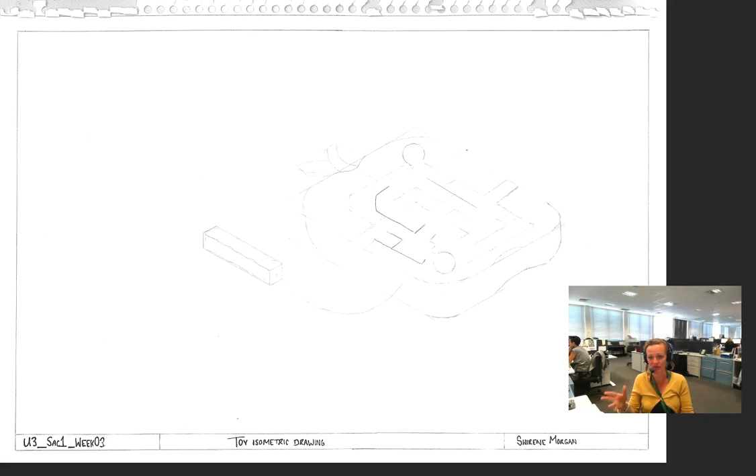So what I'm going to do with this video is just go through some of the things that might be missing. They're tiny things that might be worth 1 or 2 marks. So I'll just mention them so that you can have a chance to correct them and get it ready for inking, which you can do before week 8.

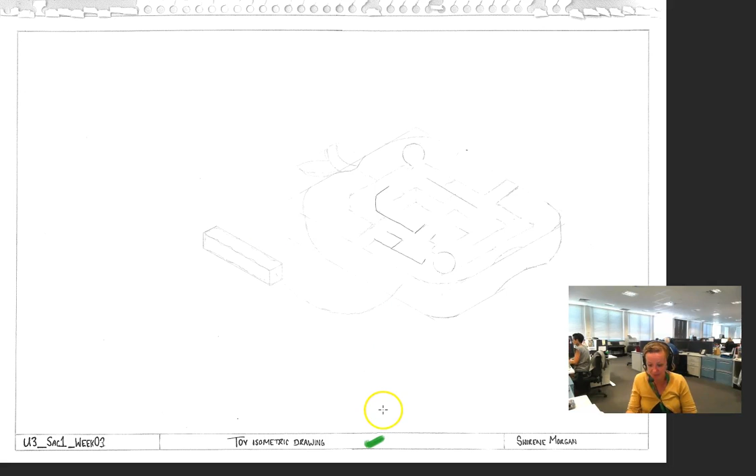So the first thing with the toy isometric drawing, I just wanted to check whether you needed to have the scale. Got the wrong brush set up, sorry about that. So is the scale the same as your orthogonal, which I think is 1 to 2? So just be mindful of that.

The other thing was, I'm not sure if these circles here, they look like they're sticking up, they look a bit funny, so I just wanted to make sure that you have actually drawn them correctly in the isometric view. So I'm actually going to draw a square. Imagine that square is 3D. That's now an isometric cube. So I'll do it see-through.

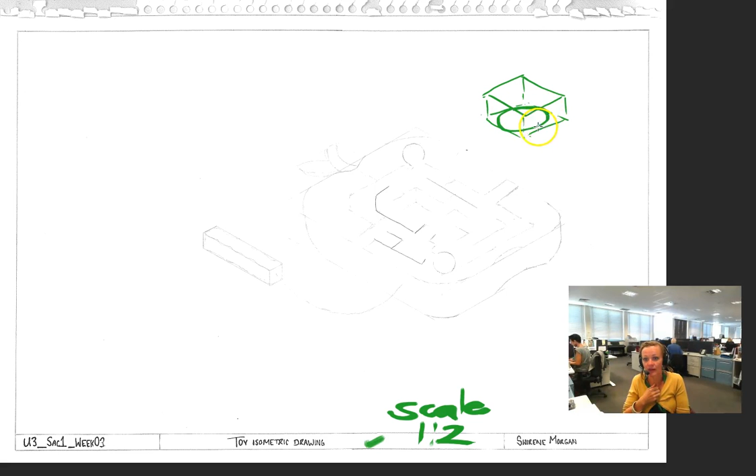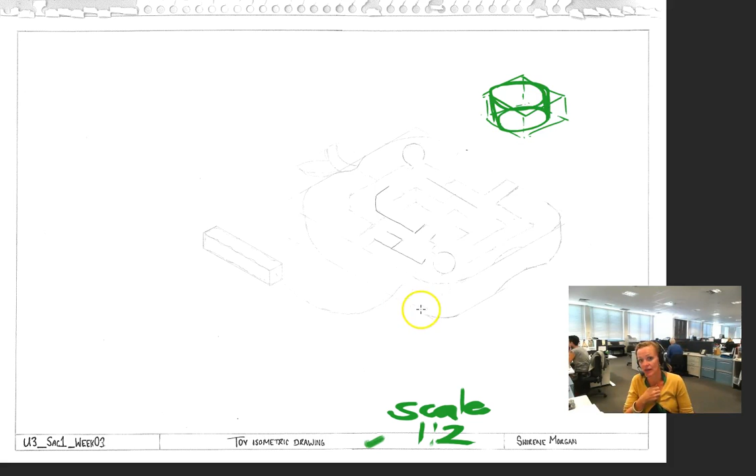And if there is a circle somewhere on your toy, it should actually be drawn in the isometric view. So that's how you draw circles in isometric. So just go ahead and check that on your drawing. So that's the isometric, so good job.

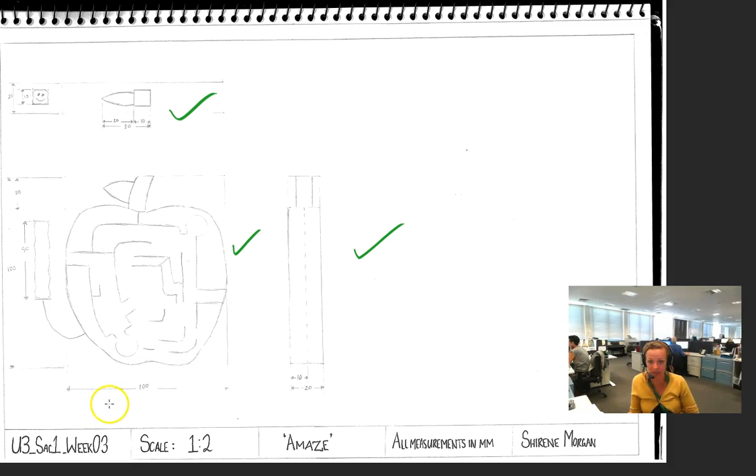Now we'll move on to the orthogonal. So your views are correct. They are aligned correctly, they're equidistant from each other, which is good. The only thing missing is with labelling, so we need this to be labelled front, side, and top.

You might want to also have a look in the technical drawing specifications handout, which I'll pull out here, and there is advice on how to do lettering.

Just shut my email down, sorry about that. Let me just get...

So in this handout, which I know you've got, there is information on how to do lettering. So it's on page 16. So I know you've had a really good go here, but see how the capital letters you've made bigger? It's actually better if just everything's the same height.

The reason for that is it's a drawing for manufacture, so any kind of artistic representation of type is going to draw attention away from the information on the drawing.

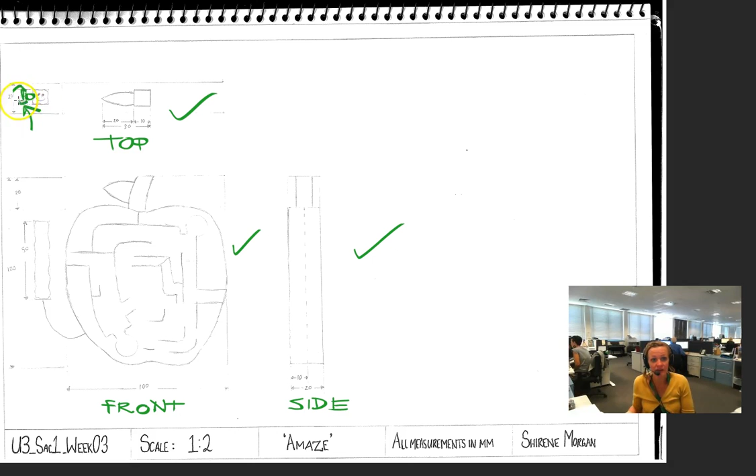So the other thing you might want to look at is in terms of dimensioning really narrow distances. So at the moment you've drawn the 10 inside your projection lines. Another way you can do that for really tiny measurements is you put your projection lines for the area you want to measure, and you actually draw the dimension lines on the outside of the projection lines. So that's another way of doing it if you've got a really small measurement.

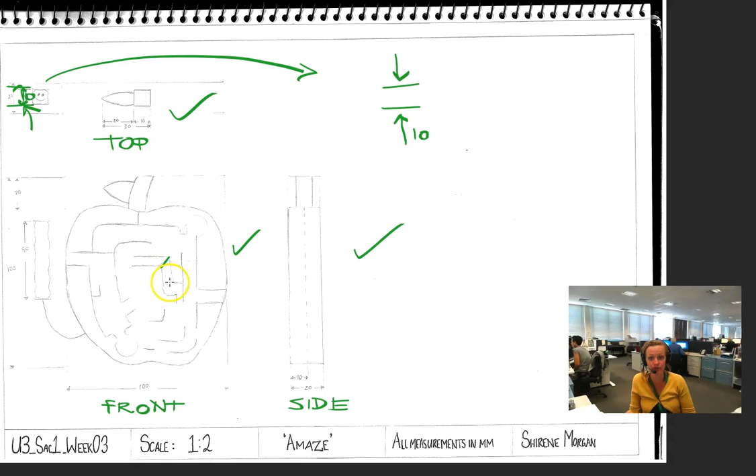The one other thing was that this angled line here actually makes it look like the front view has got some 3-dimensional qualities happening. So remember that with an orthogonal, it's just 2D, a flat view. We're not going to see any depth. It's all going to be squashed. Imagine there's a piece of paper in front of it, and every line that you see gets squashed back onto that. So we don't see any of those angled lines.

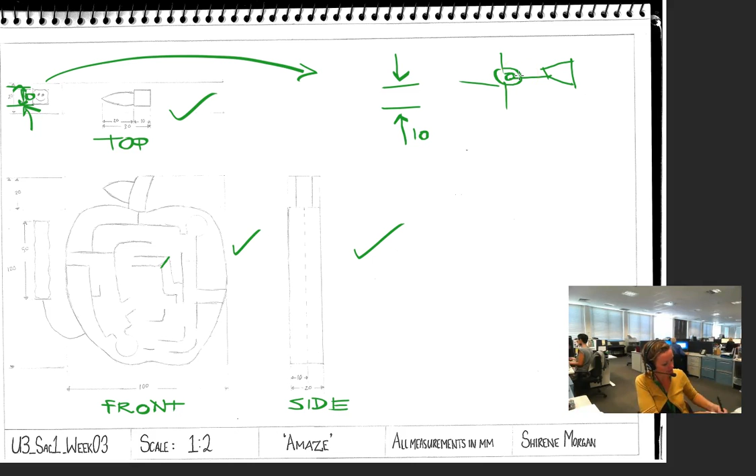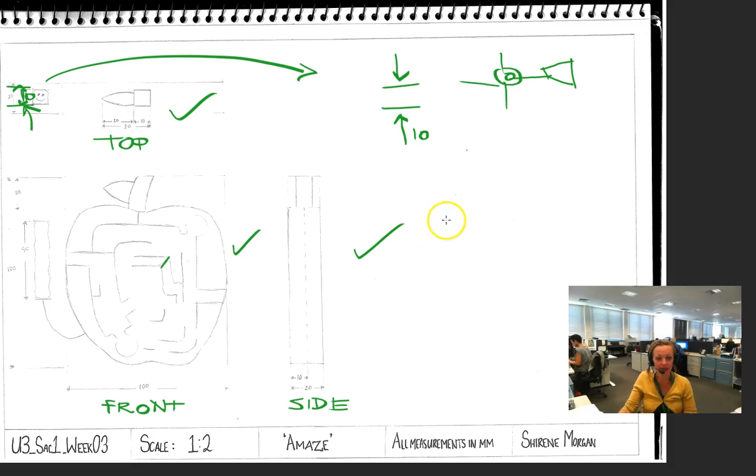The other thing missing is your third angle orthographic symbol. That's 1 mark, so you can check it out on page 24 in that handout. I think that's about it for that one. Now your scale is accurate, and it's a really good drawing, so well done.

We're just going to move on to your Scamper page. This was fantastic, absolutely delightful. I really liked the way you substituted your magnet here for a caterpillar or a worm, because it is an apple. And I like that you've also included a little 2D sketch up here.

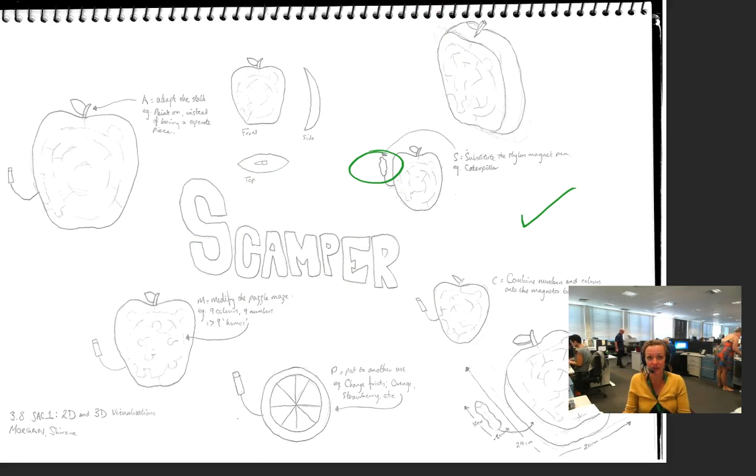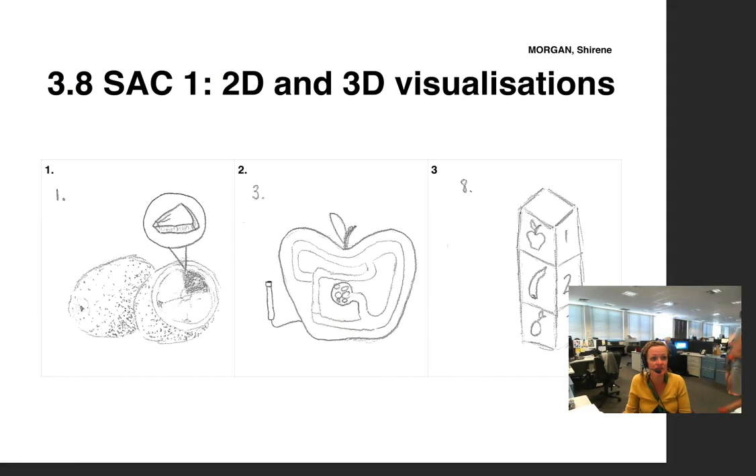And what we can see here is visualization sketches that are 2D and 3D, which was the whole purpose. So great job there. You'll get a very good result for that. And your PMI, your descriptions here were terrific and so thorough and well considered. And they're the actual visualizations, and then the one you've chosen.

So all up, a fantastic week of work. Just a couple of things there that you need to amend. Great job, Shirene.